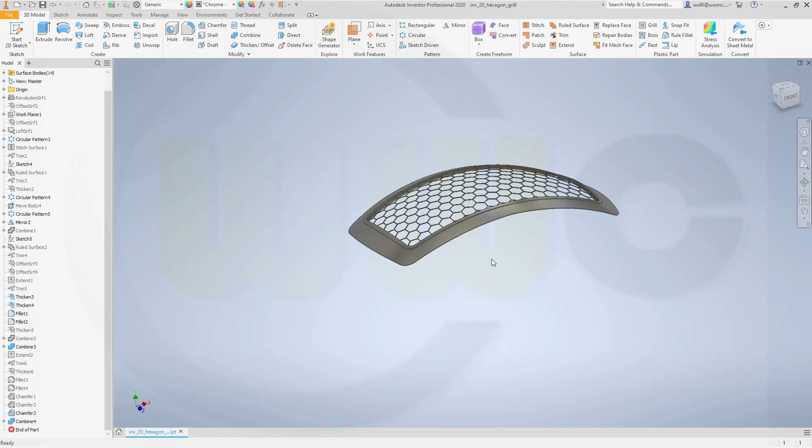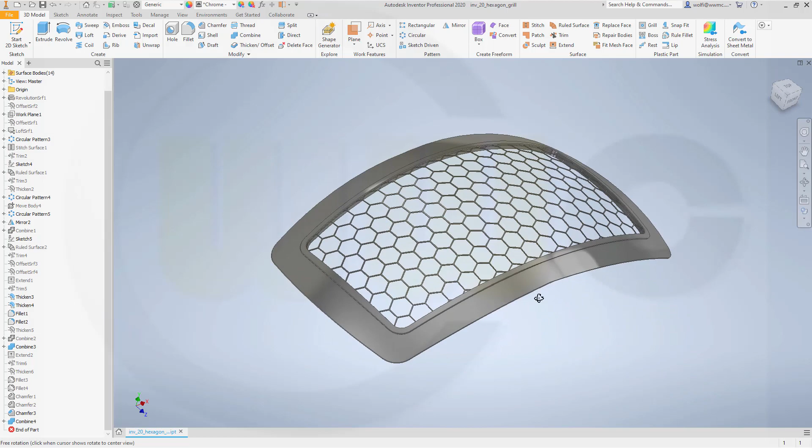I want to do that hexagon grill now in Inventor. And again, please note, these hexagons are equally sized, but the space between those hexagons is not equally sized, because it's not possible to cover a sphere with equally sized hexagons. So, let's have fun with Inventor.

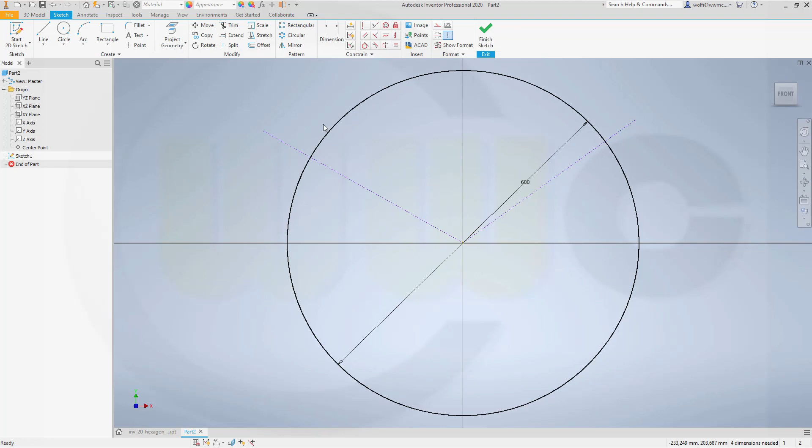Okay, let's start with a sketch on the XY plane. I need a circle. Diameter should be 600. And some lines, both of them for construction only. Now trim. Align those 2 points horizontal and give it a dimension, maybe that's 80. Finish that sketch.

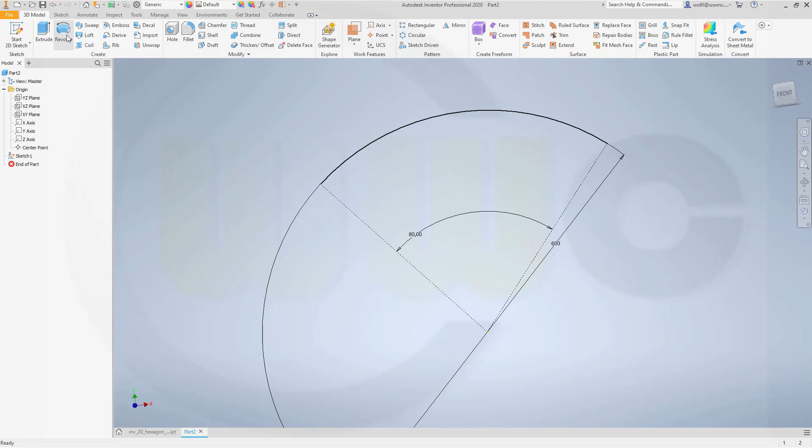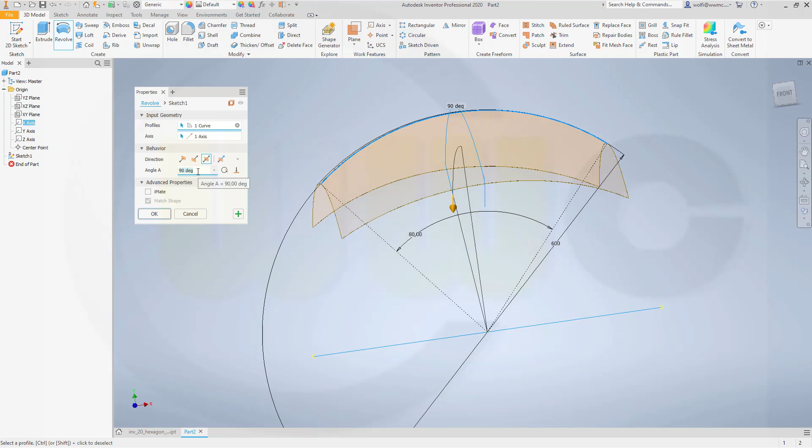And let's make a revolve. It should be a surface. Yes. The axis would be, I think it's the x-axis. This should be the axis. Yep. And I need it to be symmetric, and I want to go for altogether 90 degrees. Yes, and confirm.

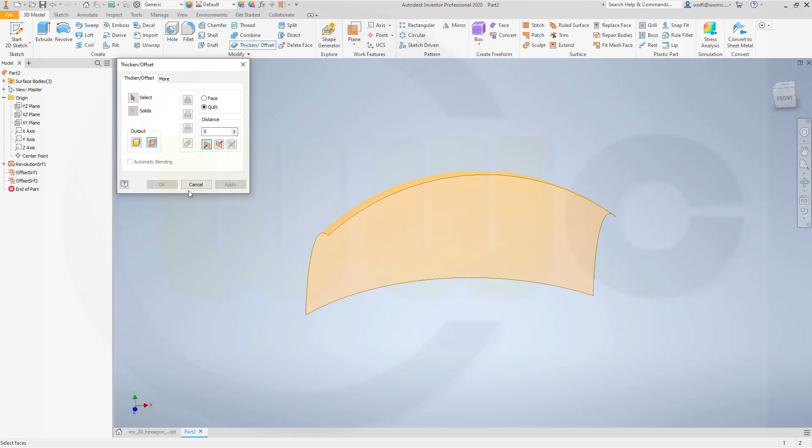Okay. I need, of course, a copy of this one, so we'll go for an offset surface. Where's my offset? There you go. I need a surface quilt 0 and select the surface and apply, and I might need another one, so I will go for another one and apply. So I got 2 offset surfaces. They should do. And maybe hide the original one and one of the 2 offsets as well.

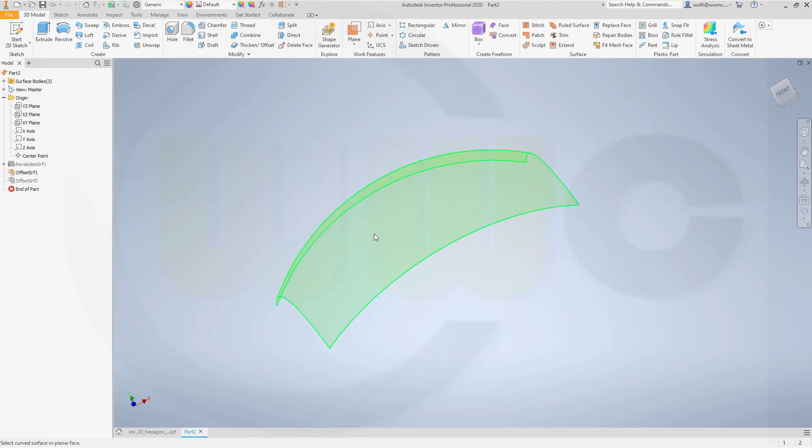Now I need a plane which is tangent to that surface. So let's see if there is a solution for that. Tangent to surface parallel to plane. Yes. That would be the surface, and the plane should be, no, maybe that's the plane. Yeah, that's the plane, the XZ plane. And now I could do a sketch on that plane.

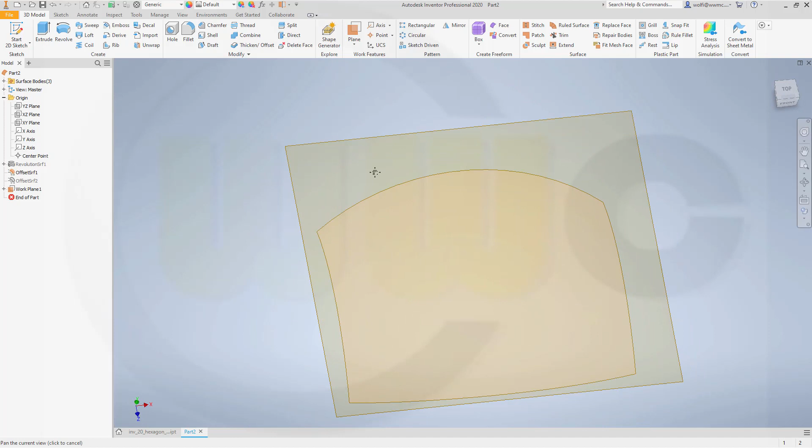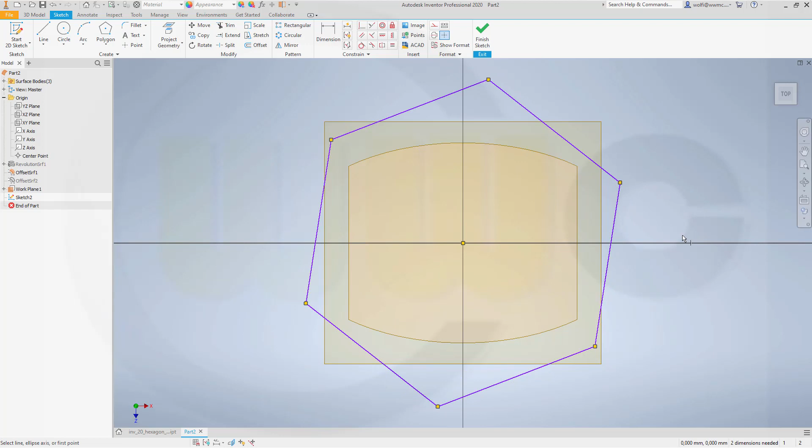So go for a sketch right there, and I need a hexagon. Where's my polygon? There you go. 6 sides, yes. Let's draw it out like that and make this one vertical. And give it a dimension, so this side should be 10. Finish that sketch. Now I could hide the plane.

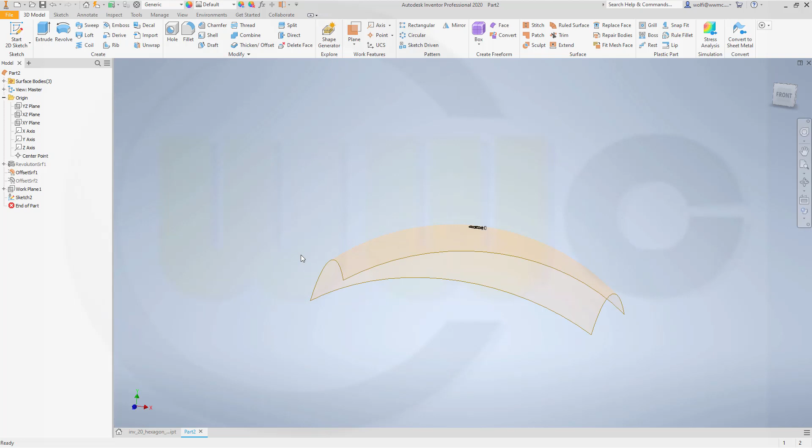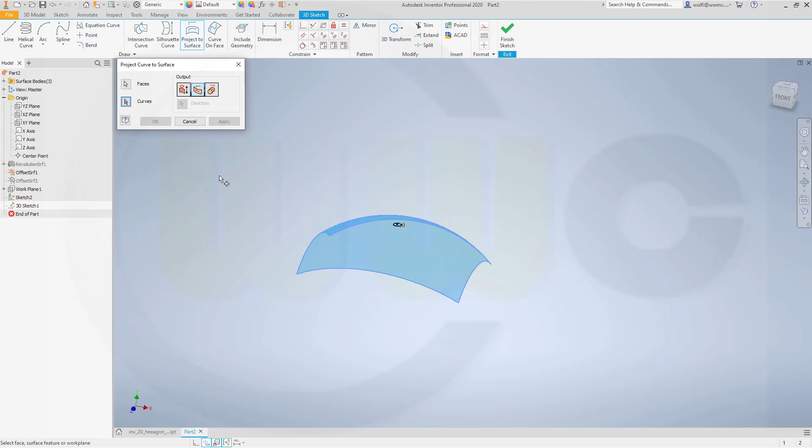And I need to project that hexagon onto that surface. Therefore I will need a 3D sketch, so let's go for a 3D sketch. And project to surface, shortest to the closest points, yes. The face would be this one, and the curves should be those. And okay, now I just finished that sketch, hide the sketch.

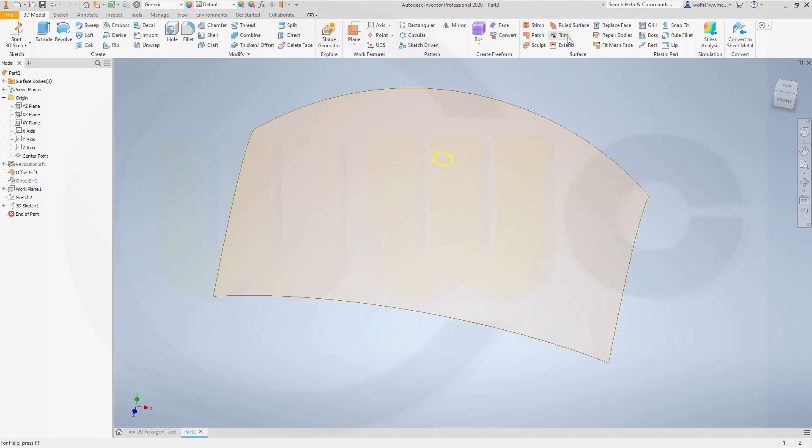And sadly I could not trim that surface with that curve. That's odd, so I did it in a different way. I went for a ruled surface, and I want to go for a vector. That would be the y-axis as vector, and the curve would be this one. 10 degrees should do. And now I can trim that surface with that ruled surface. That's really strange because in Fusion I can trim with that curve.

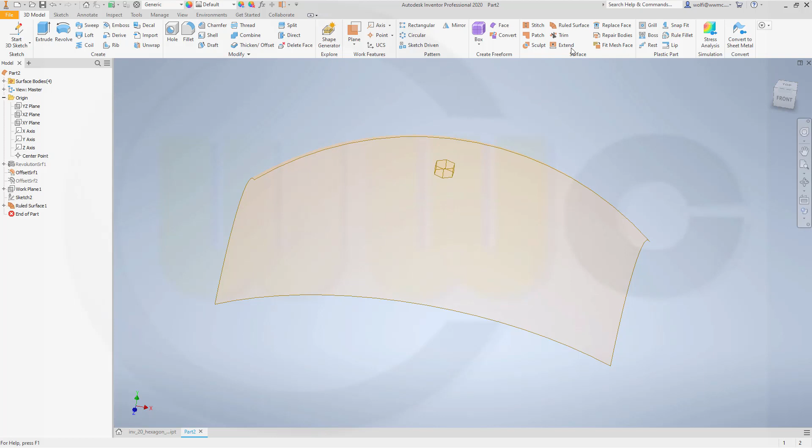So let's go for trim. I want to trim with this tool, and I want to remove the outside, and okay. Let's hide that ruled surface. Now I want to pattern this around the x-axis. So go for a circular pattern. And should I pattern the faces or the bodies?

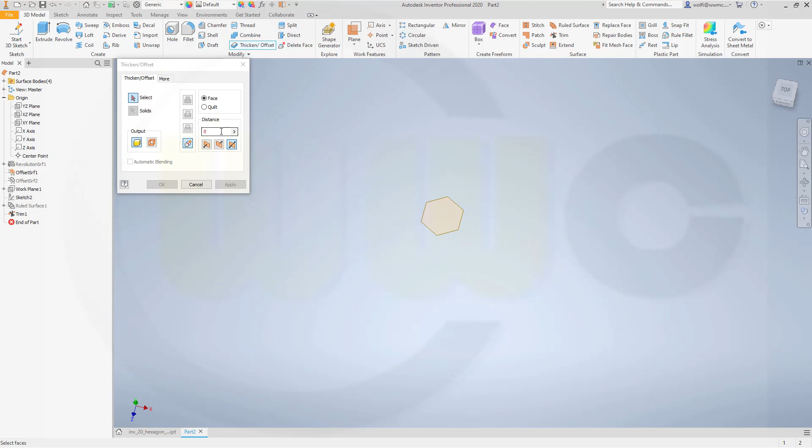Let's take a look. So I will thicken that one and pattern the bodies. Thicken to both sides, and this should be 1 millimeter, and that would be the face. Let's take a look and confirm. Now I want to pattern that body. Maybe show that axis. Yeah, that's the right one.

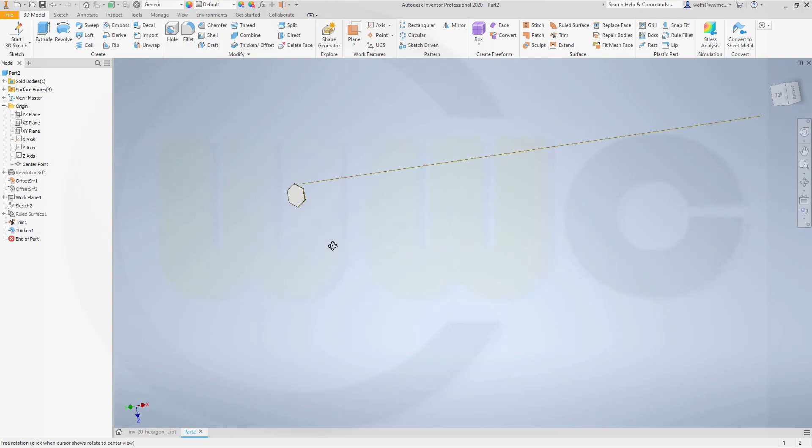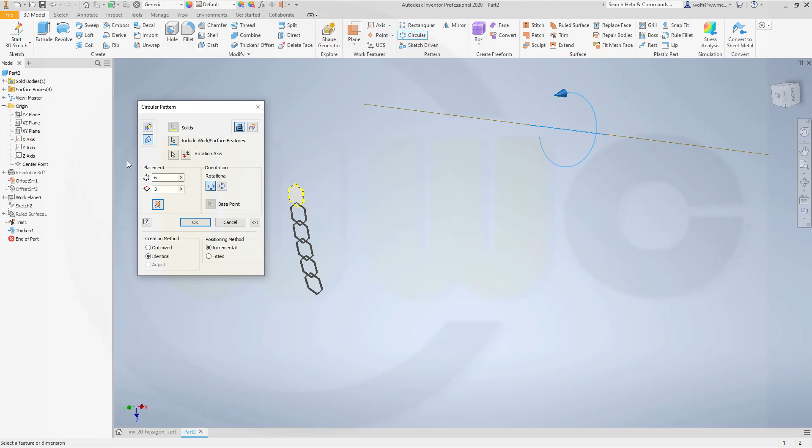So go for a circular pattern. I want to pattern the body. That body, that's okay. And the rotation axis would be this one. And I need it to be incremental. I need 6 instances with 3 degrees spacing, but maybe the other way around like this, and confirm. Yeah, and I want it to be new bodies, and okay.

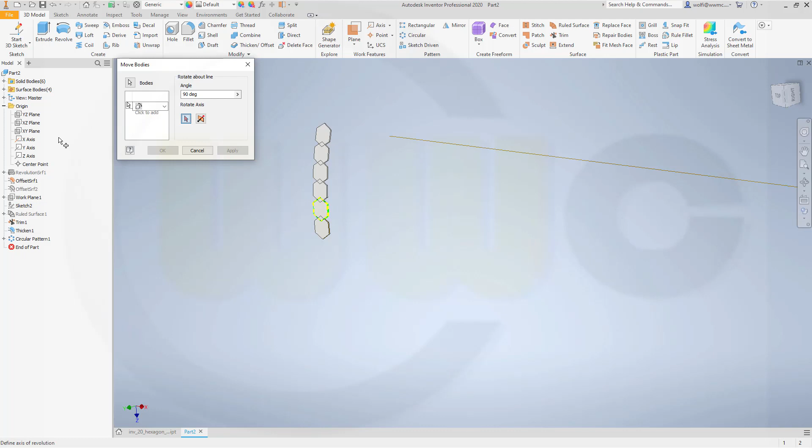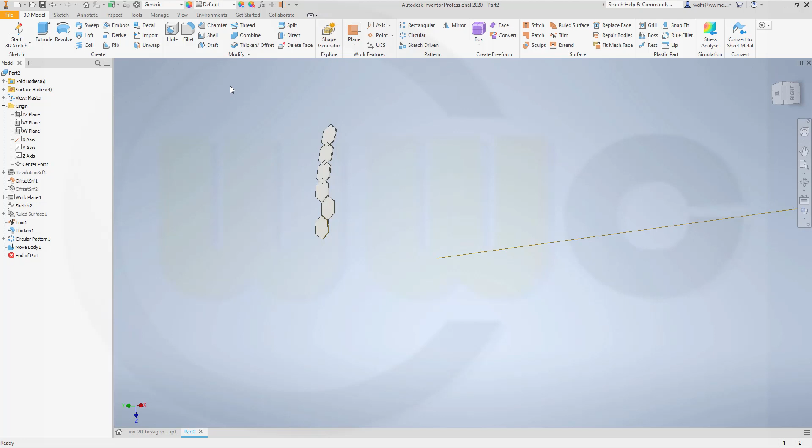Now let's move 3 of them. So go to modify, move bodies. I want to move that body, but I want to rotate it. And the axis would be, let me take a look. It's always hard to tell. No, it's the Z axis, yes, and it should be 1.75 degrees, maybe to the other side. Okay, then repeat that command again, move bodies.

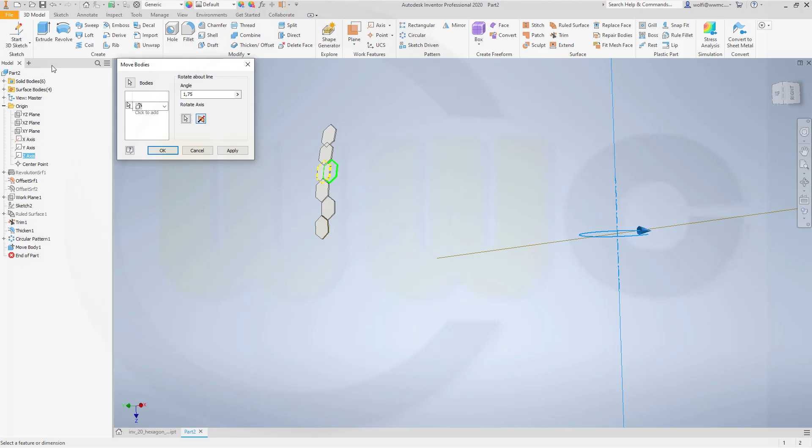Okay, it was the Z axis, and it was the other way around, and go again for 1.75 degrees. Apply. Next one, rotate around the Z axis, 1.75 degrees, and okay. Let's hide that one.

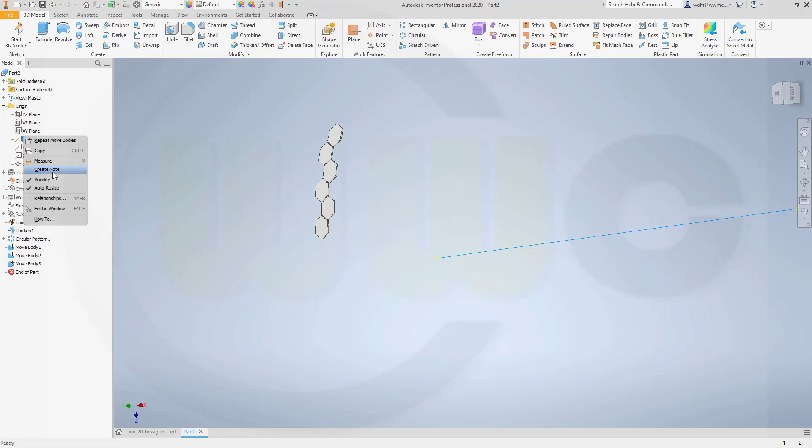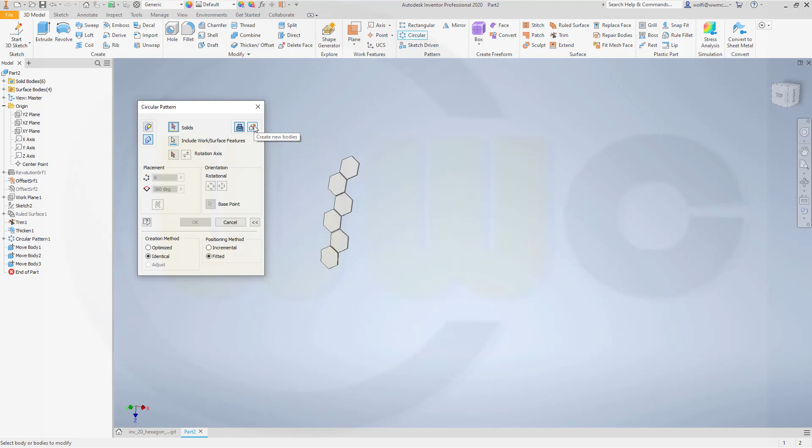Now I could pattern those bodies or solids. So go for another circular pattern. I want to pattern all those bodies, and I want it to be new bodies. 1, 2, 3, 4, 5, 6. Rotation axis would be again the Z axis. I go for incremental, and I want it to be 10 with,

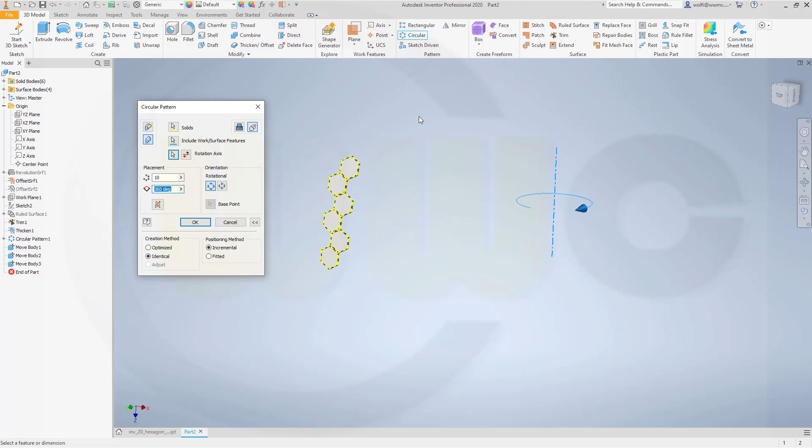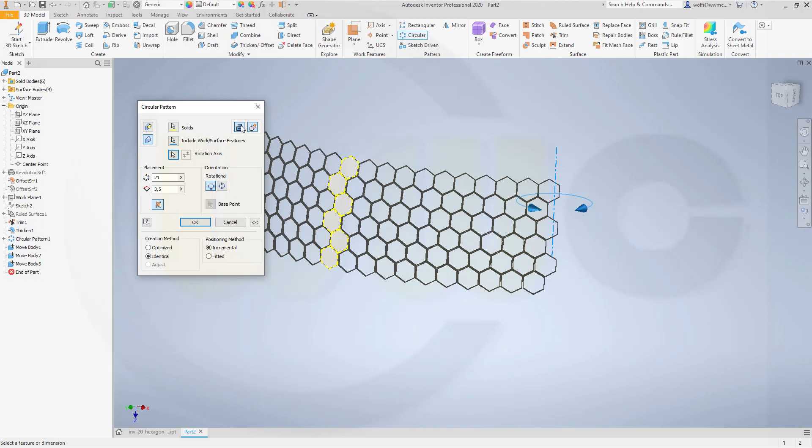that's 3.5 degrees, maybe the other way around, but I could go for a mid-plane, so I could even go for 21 and then for the mid-plane. Yeah, that's more like it. Could I join? If I join them, let's see what will happen. Okay, is this one body? So I got 1, 2. Oh yeah, that's nice.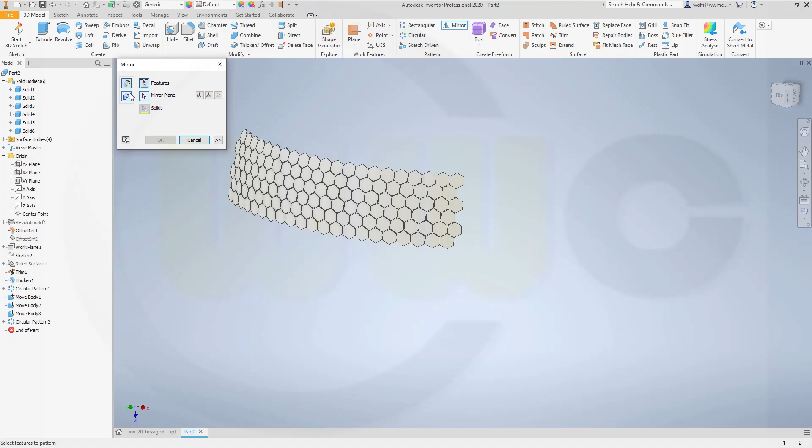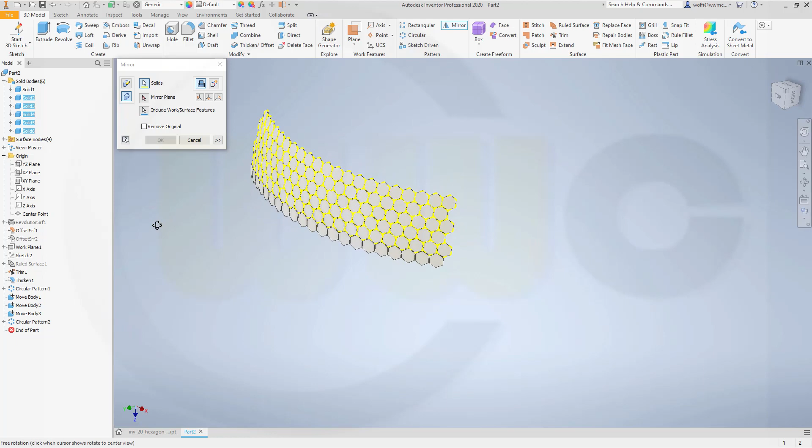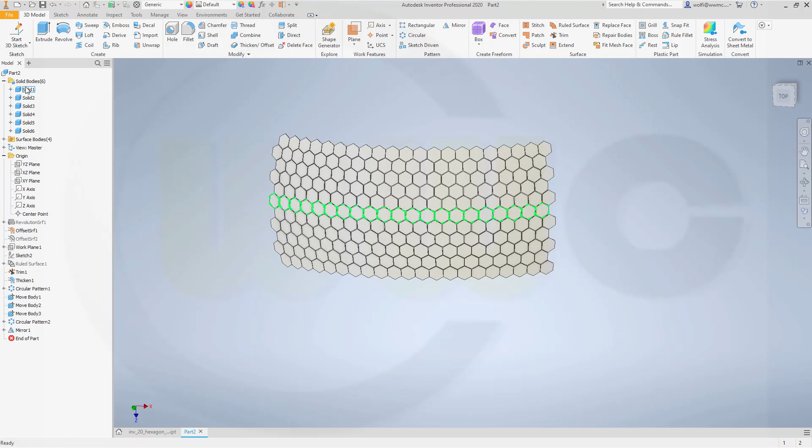Now I want to mirror those bodies. So go for a mirror. Where's my mirror? There you go. I want to mirror bodies. 1, 2, 3, 4, 5. This one not. Try to join them. And which plane? That's the XY plane. Yeah, okay. Now I got 1, 2, 3, 4, and those are quite nice. I could hide those bodies, at least for the moment.

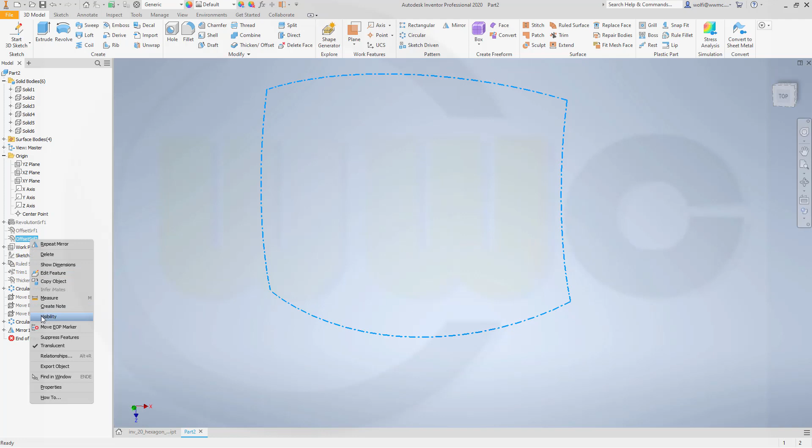And I need the original surface. That would be not this one, but the other offset one. Let's hide this one and bring that one. I will need another sketch on the work plane. So let's go for a sketch right there.

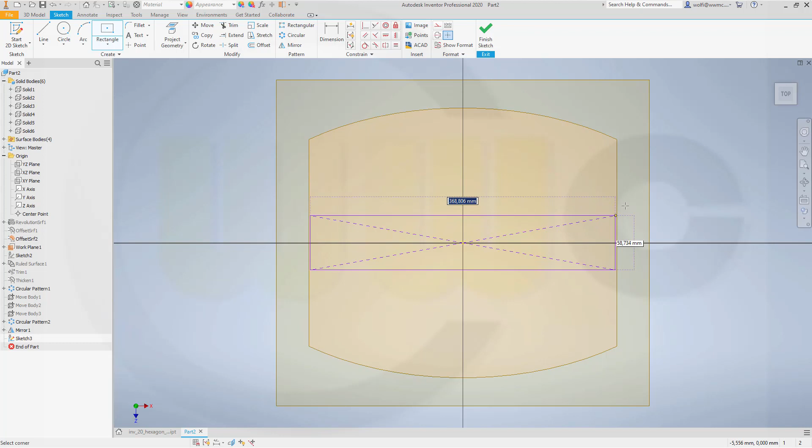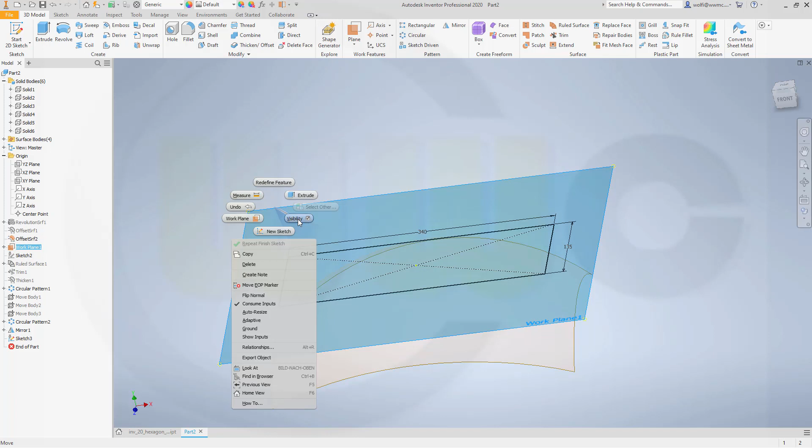And of course it's a rectangle and a centered one. 2-point center, yeah. Here, and let's go for 340 and 135, like that. Finish that sketch. Now project this one, maybe hide that one, to that surface.

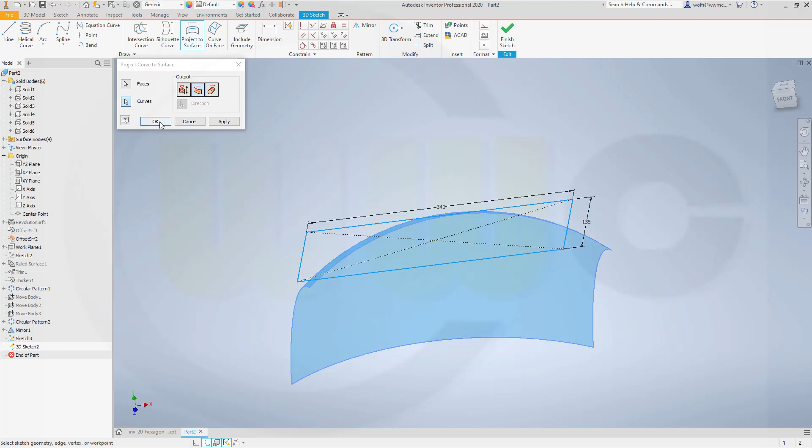So go for a 3D sketch, project, closest, that would be normal, the face is here, the curves are those, and okay. Finish this sketch, hide the old one, yep. And now again I will use a ruled surface because I can't trim with that curve. So go for ruled surface.

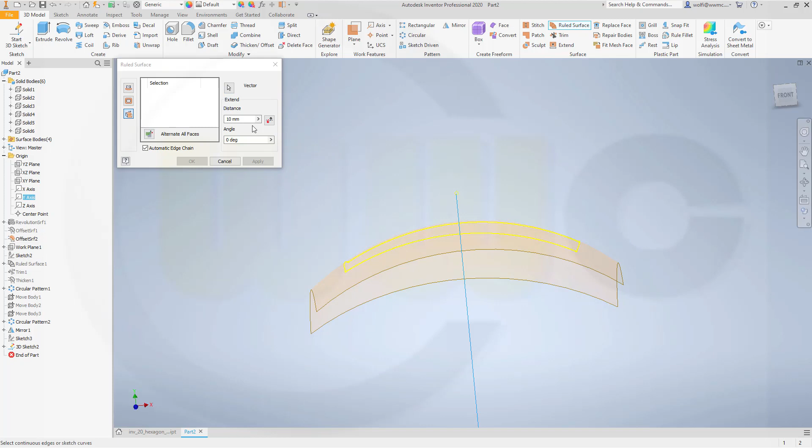Yes, direction would be in this case the Y direction. This one. 10mm should do, and that would be the curve. Okay, and now I can trim and use that ruled one as tool, and remove the side and confirm and hide that ruled surface.

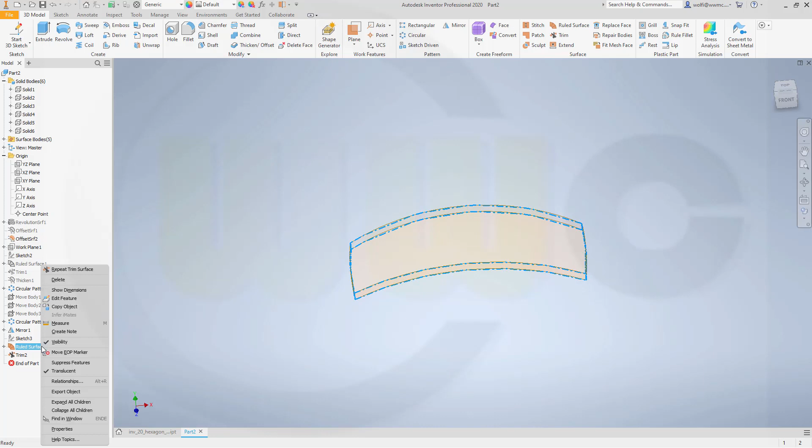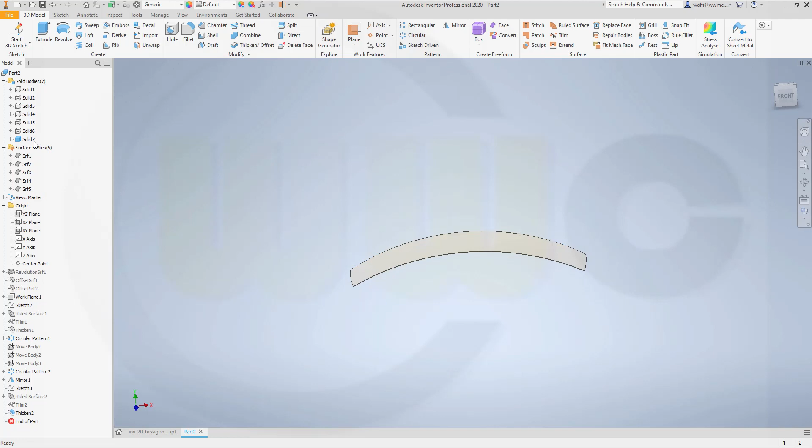Now I want to thicken this one, thicken that surface. Now I want it to be a body, a new body. Face yes, go to both sides and make it 0.5. Great. Hide the surface like this, and now I want to remove those from that one. So bring them back.

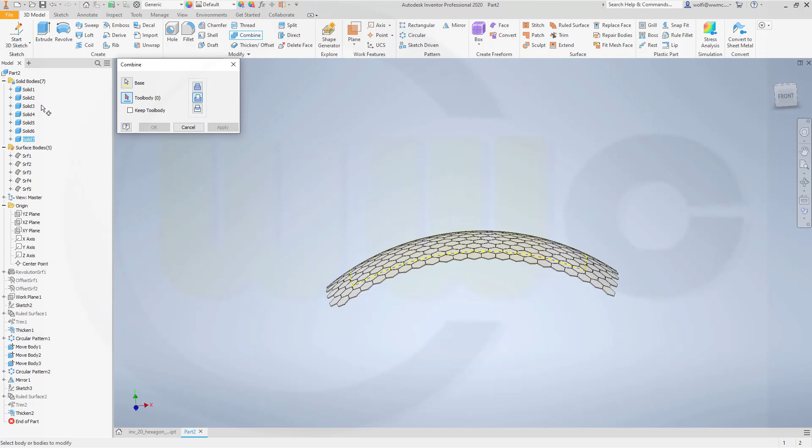And now let's go for a combine. The base would be solid 7, and I want to subtract the tool bodies. So I want to subtract this one, that one, this one, that one, this one, and that one. And okay. Great, I got my grid. Nice.

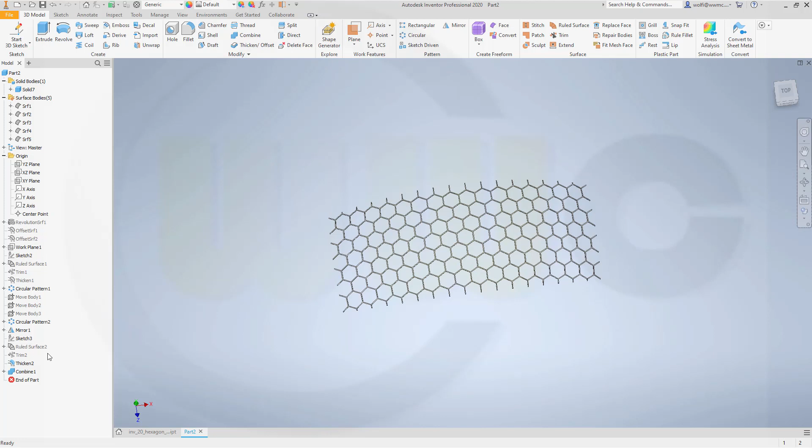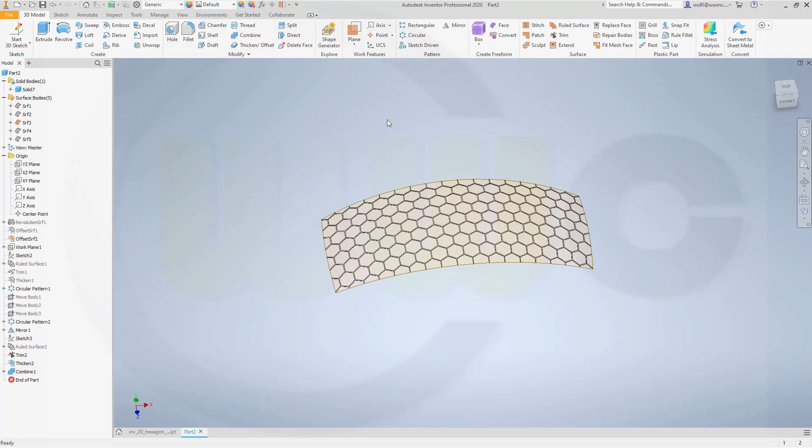Now let's bring back that trimmed surface. I think that's this one. And that would be not the ruled one, but this one. Make it visible. I want to extend that surface. So go for an extend, maybe hide the body. Go for an extend. I want to extend edge chain, yes. Here to all sides. And I want to go for 5 mm.

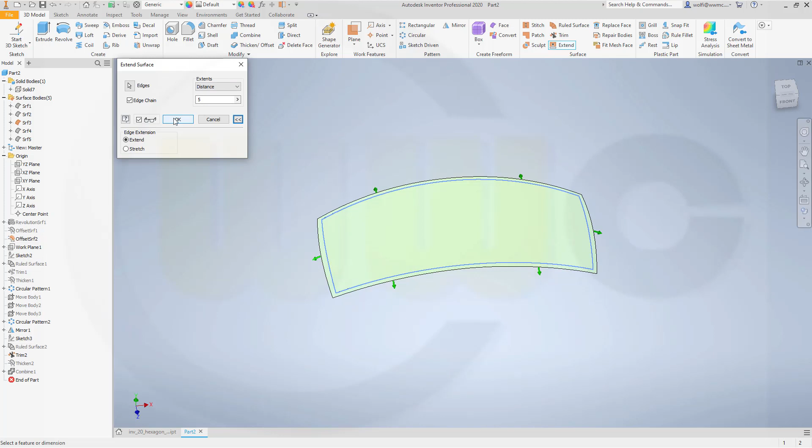And that's okay. And confirm. Now I could trim that surface with that ruled one, and the ruled one I think was this one. Let's bring it back. Yeah. Now let's go for trim. That would be the tool, and I want to remove this side in this case, and okay. And hide that, no, this surface.

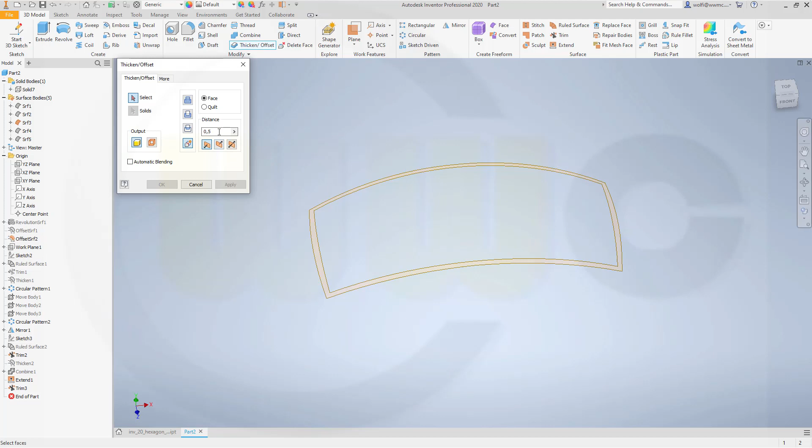Let's thicken that. I need a body, a new body, yes, both. Yeah, not both sides. So I have to go to one side and then to the other side, because I don't want it to be symmetric. Okay, so let's go for 2 mm up, and that would be the wrong one, so that's up. Apply.

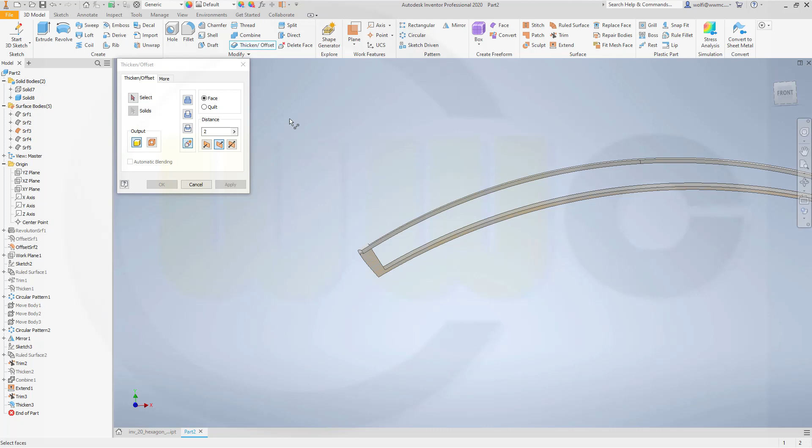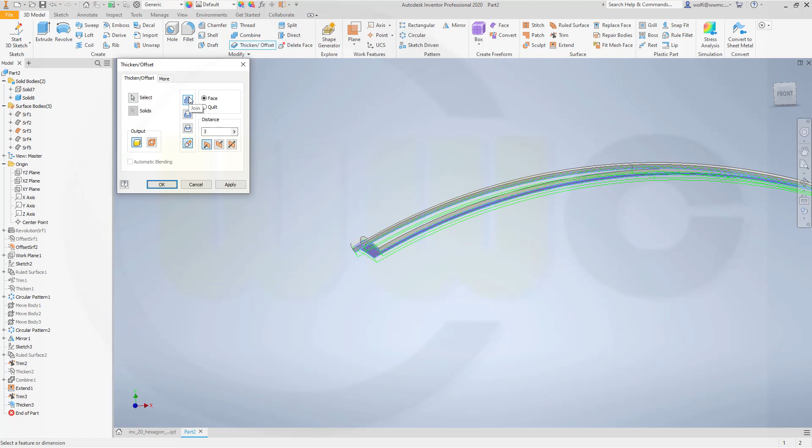And then could I hide that? No, not for the moment. I have, yeah, there it is. I have to go for 3 mm to the other side. Let's take a look. In this direction, yes, and we want to join it with the already existing one. So let's see if that works. So that should be one solid, yes. Hide that surface. Now let's do some fillets.

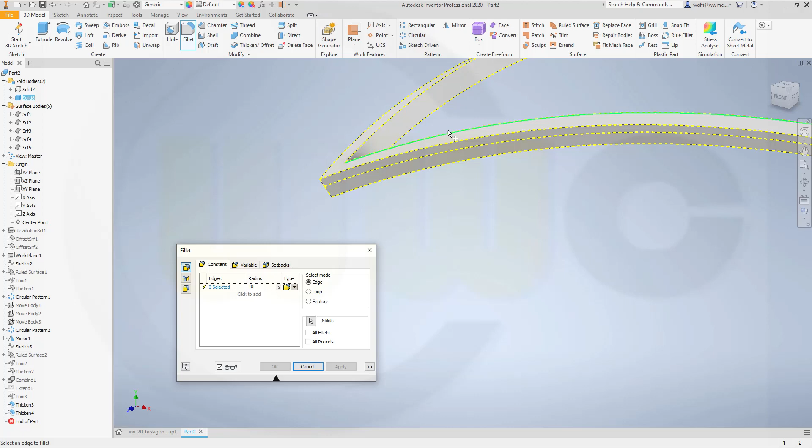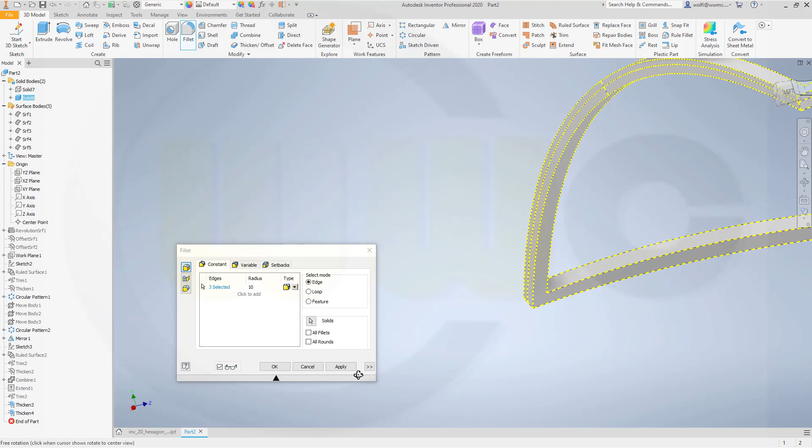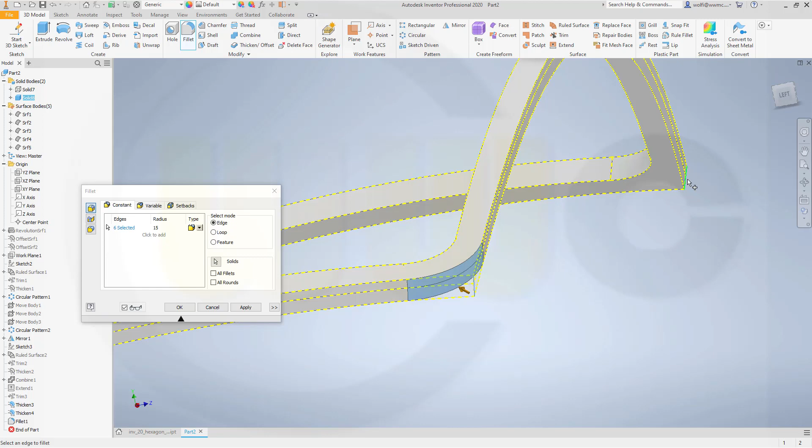Let's go for 10 mm. Here. Over there. On this edge, and yeah, on that edge. Apply. Now go for 15 mm here, there, here, and there, and okay.

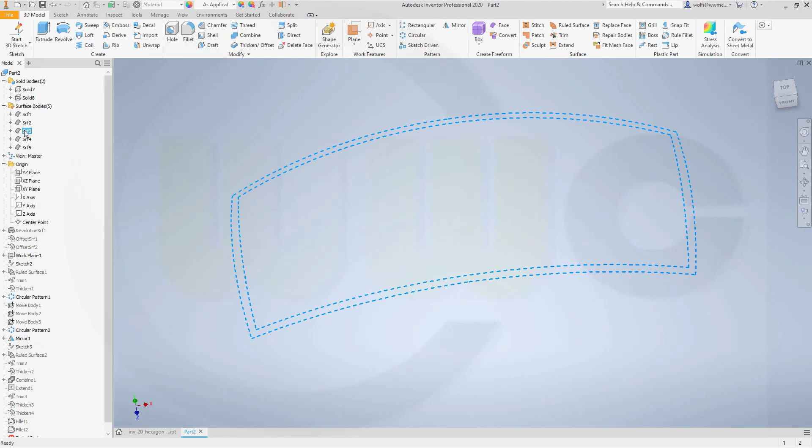Nice. So I got those two, yeah. I could already combine them, but I will hide them both. And let's bring back that surface. And I want to extend this one. So go for extend. Let's go for 20 on this edge, that edge, this one, and that one.

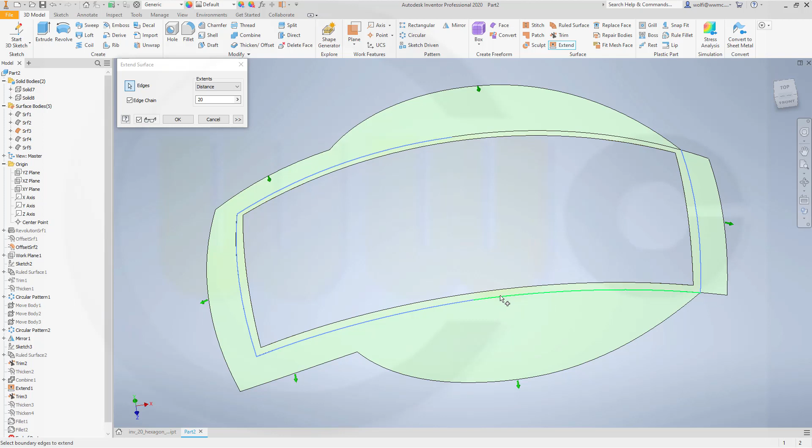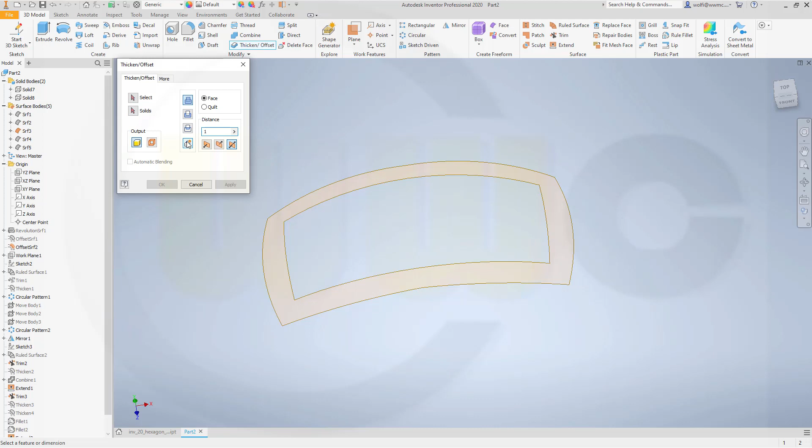So that's kind of crazy because those edges weren't recognized, but that looks okay. So confirm, and again, no, I don't want to trim. I want to thicken offset this one, symmetric with 1 mm. I want to go for a new body, yes, face, yes, and select it, okay, and confirm. Hide the surface.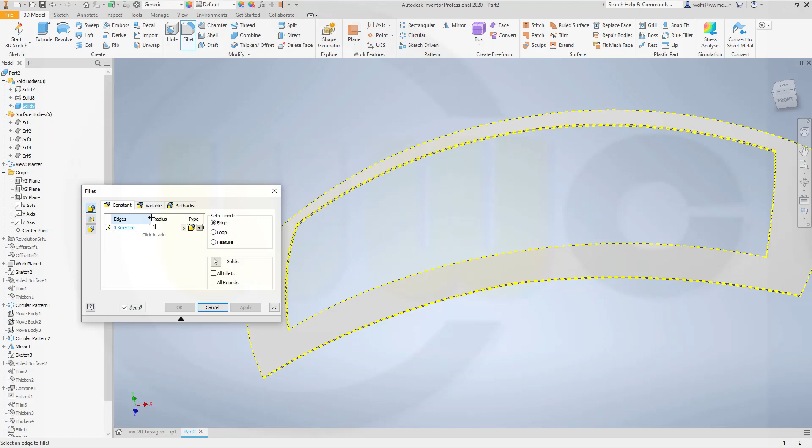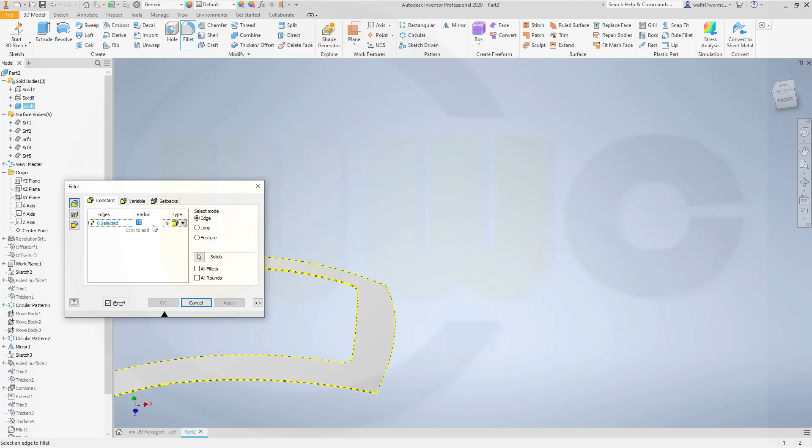And let's make some fillets. So we'll go for 10 right here. That should work. 10 here. Let's see if I can. This one, that one, and this one. Apply. Now go for maybe 20 right there.

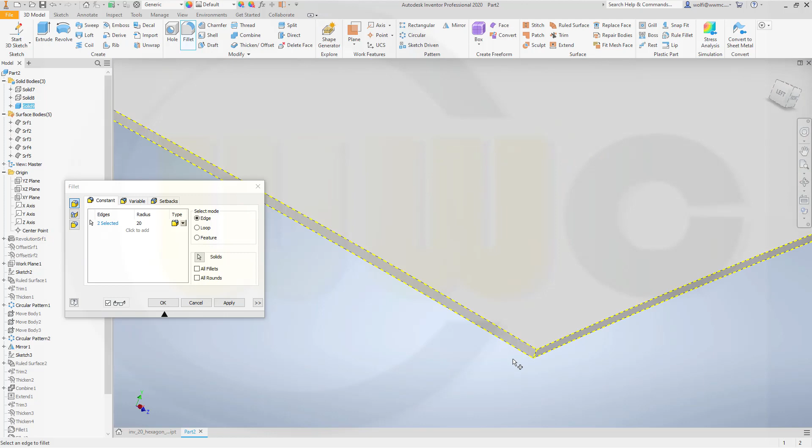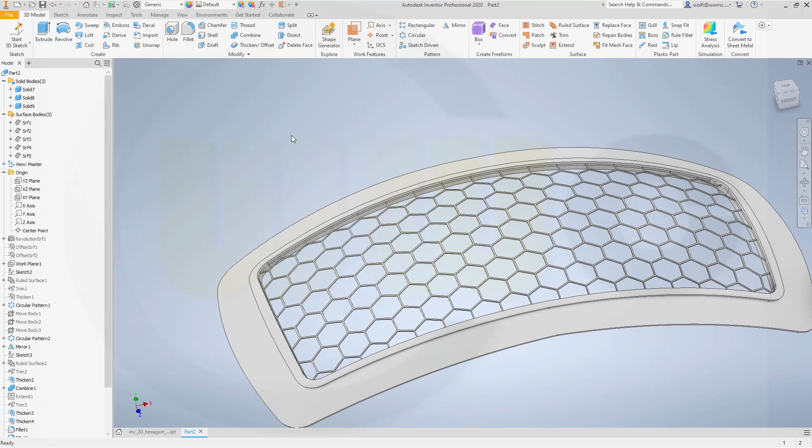Oh, it's hard to see. That's the one. Go here, yes. That edge, and of course this one. Okay, now let's bring back the other bodies. Yeah, looks good. Now unite them, go for combine and join them.

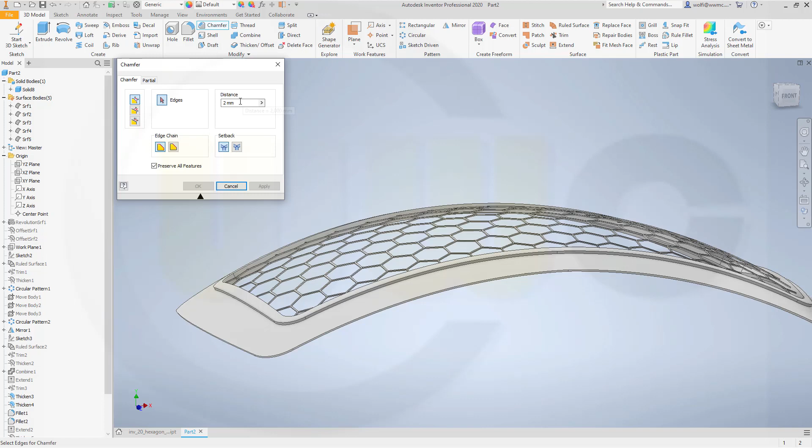The base, I could use this as base, tool body this one and that one. Okay, and I'm done. Oh, almost. You could add, of course, a chamfer. Let's go for 0.5 on this edge, apply, and that edge. Okay, and now I'm done.